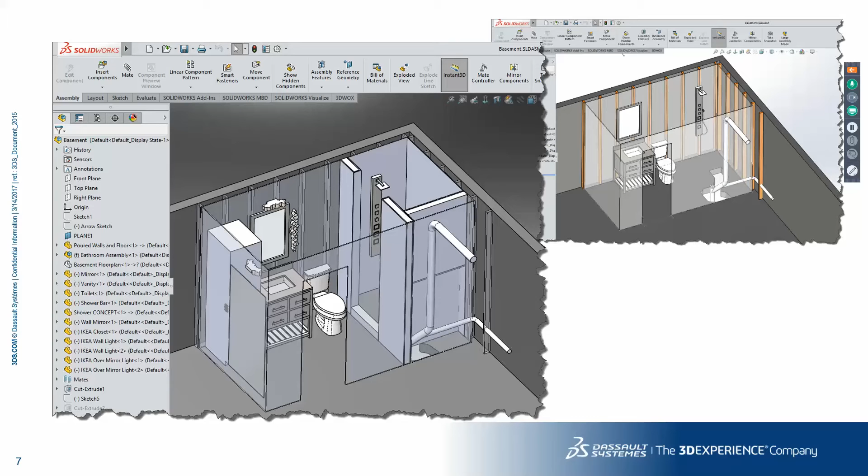My current project, which is coming along very nicely, is this brand new bathroom in our basement. So section 3, which we're going to be doing a week from today, I'll hopefully be posting some finished pictures of this for everybody.

So the things we're going to cover in this presentation sort of dovetail what we did in the last presentation. Our 5 pillars here are innovate, design, validate, collaborate, and then manage and build. And those are the perspectives that we really look at our software when we're looking at it from the customer view. Now, for what we're talking about today and the data set that we're using, we're leveraging a data set from Myomo. And they're a SolidWorks customer that really utilizes every aspect of what our tools have to offer.

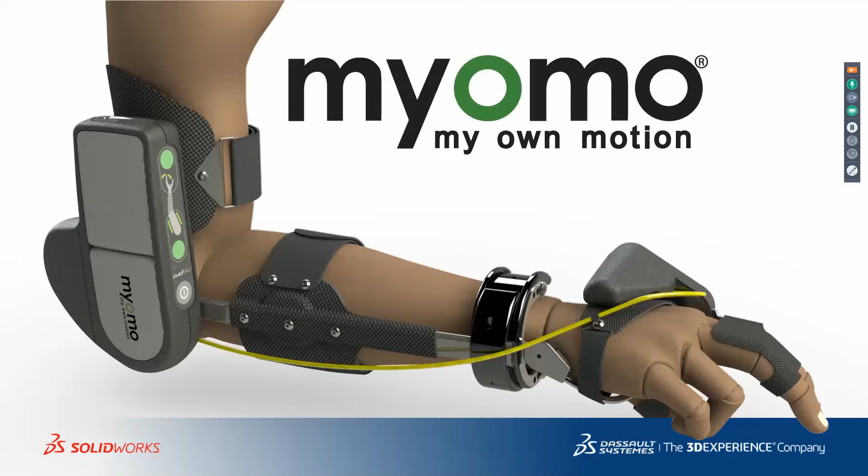Obviously, with these files, there's mechanical design, but there's also freeform shapes. There's electrical, right down to printed circuit board. And it really does encompass the gamut of what SolidWorks is useful for, which is basically everything. Now, when we're building the software, we have these pillars in mind. But as a user, you're really taking these pillars and applying them to your final solution.

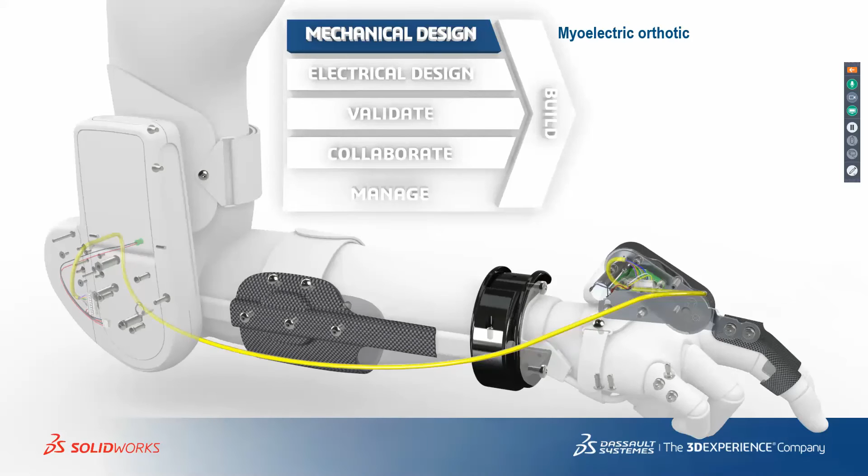So for Myomo's sake here, they take our mechanical design software and they use it to create this myoelectric orthotic. It's a functioning, moving device. The electrical design enables them to use motors and actuators and sensors to be able to overcome paralysis. So it is truly electrical design in our eyes, but it has a downstream goal involved.

Validation is something everybody should be doing. When critical parts are involved, we want to make sure that those parts are going to function, and especially when it comes to parts that are going to be produced in mass quantities. Validation allows us to not only find out whether our parts are going to break, but what I find almost more important is finding parts that are over-designed and being able to enhance and optimize the material utilization.

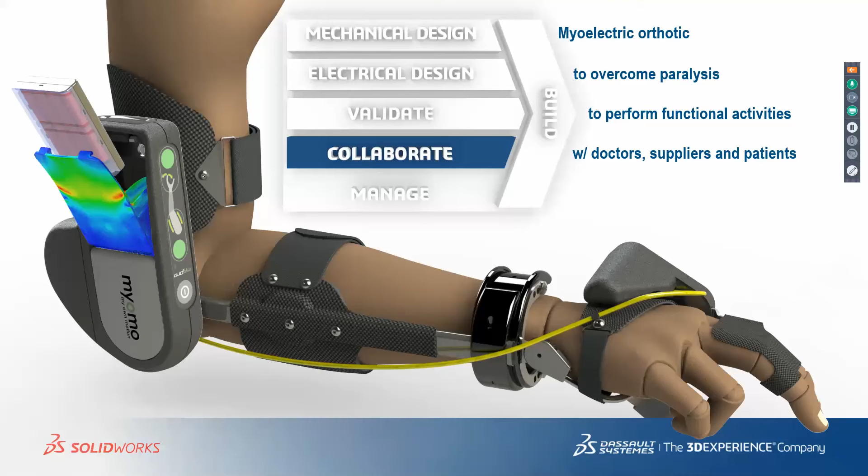So when you make a lot of parts, especially when it comes to plastic and metals, you're going to be able to save a lot of those material costs up front by designing the most optimal part for its use case. Now, collaboration happens in the eyes of everybody in a little different way. For this type of product, it really is a collaboration between everybody involved, not just the designers, but the doctors that let us know what patients' challenges are, and the patients themselves who give you feedback as to exactly how the application works, what is working and what isn't, so that things can be modified and revised as necessary.

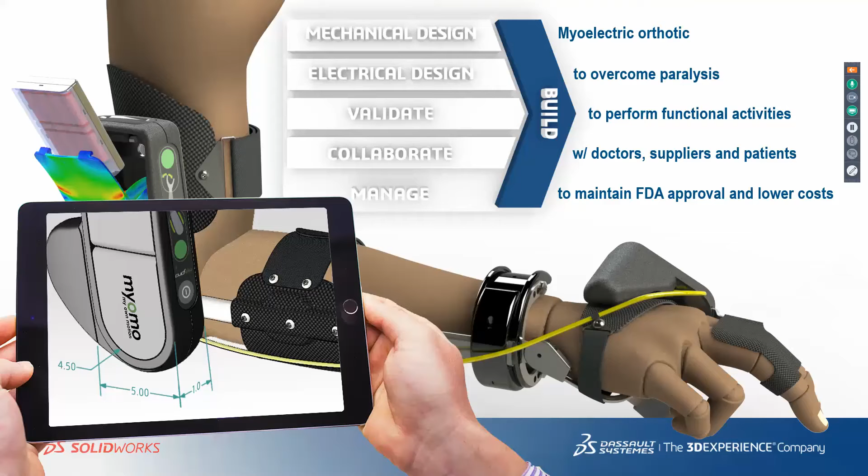And then everything that's taking place really should have a single source of the truth, and that's management software like PDM. In this case, when you have the FDA involved, it's even some next level than what most people have to deal with, but it's super important to be able to make sure that the right people get the right data at the right time. Now, all of this has to happen, and this is everybody's company, but we got to do it at the lowest cost possible. So we want to make sure it's efficient and that it works, but we've got to do it in the least expensive way possible.

So the 5 pillars that we are covering here, we're going to boil this one down into part 2. We covered a little bit of design last time and the innovation. We're going to cover the rest of design, talk about a little bit of validation, and then we'll do a little bit of the collaboration area as well.

Now, validation, I'm going to show some slides and some videos for. We've already done a full 1-hour webinar for the What's New in SolidWorks Simulation 2017, which is already available on our website. But we want to cover it here just to make sure that you're aware of it, especially for those of you who are more primarily mechanical design, but still need to dabble in the validation tools.

So this is our roadmap today. We're going to do some assembly functionality, magnetic mates, which is a brand new capability with SolidWorks, and it leverages a bit of our Speedpak technology, which has evolved in a very tremendous way over the last decade. The mate controller, which we introduced in SolidWorks 2016, has some much needed enhancements based on customer requests.

And then we'll get into a little bit of validation when it comes to our simulation tools, including flow simulation and SolidWorks Plastics. Today we'll finalize with a little bit of our collaboration tools, talking about a new technology called 3D Interconnect. And then finally, some collaboration from a marketing standpoint with SolidWorks Visualize, as well as a little SolidWorks Routing. So let's go.

First, with our assembly delighters, and we use that term a lot, but I think you get the feeling for that for those of you who've been through this a few times. Delighters are those things that you just really find are pleasant. They really help the interface. Maybe you didn't think of them before, but they really do make it for a great user experience.

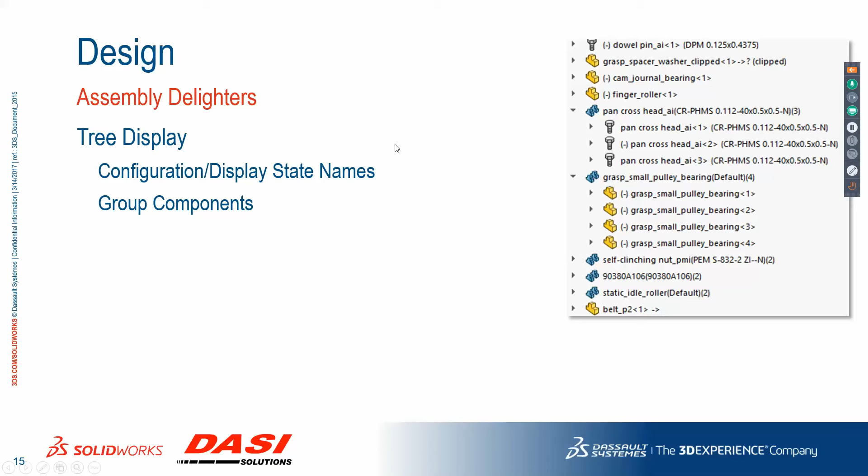Our tree display, which has been getting very, very full of detail, has some new controls here for being able to clean that up depending on your needs. We're also going to talk a little bit about how component placement takes place now during mating. And it's a little bit of a better process here just based on how you select things. And then with this section here, we'll finish up with a dovetail from part 1, which is saving assemblies as parts, but the maintaining of the references is really the most important part of this feature.

So let's get right into this data set. So what we're working on right now is this assembly. And for those of you who deal with a lot of files, maybe files that have verbose names, the feature manager can be quite a bit of an eye chart. And what we're looking at right now are things that have been required up to this point, which really do muddle the display.

Well, to clean this up a little bit, we've added a few key things to our feature manager. When you right-click the name of the part of the assembly, you have the ability to go down to Tree Display. And a new option here says, Do not show configuration display state names if only one exists. So with every part, you always have at least a default configuration, and there's really no need to see that. So by triggering this option, we really do have a much more pleasant and less muddled feature manager.

Now, another thing that can happen based on your assembly technique could be dealing with a lot of top-level components that can really extend the length of a feature manager. Now, you can compartmentalize these into subassemblies if it makes sense, but in many cases, this could be the subassembly where all these fasteners are sitting here in the top-level tree. So another right-click on the name of the assembly down to Tree Display gives us another option here where we can dynamically group component instances together.

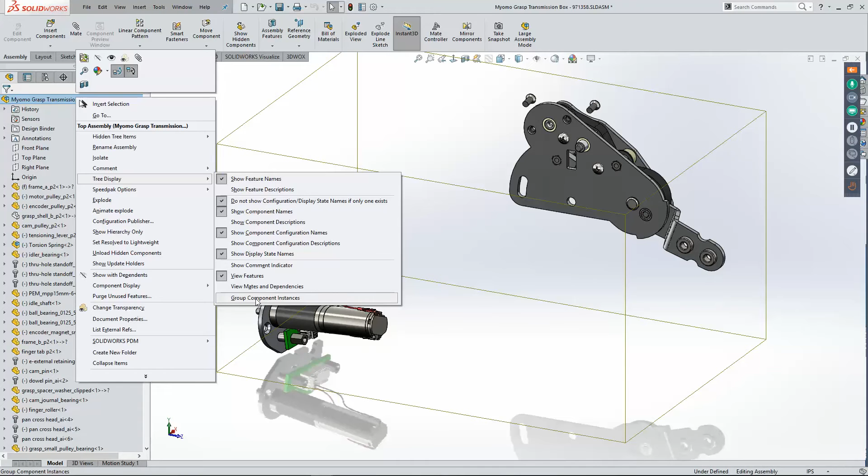Now, if there are subassemblies, it's not going to reach into those subassemblies and group them here, but it's more or less dynamic folders. So as you select it, you'll see that all of the groupings of the fasteners jump into these little collapsed types of items. Now, they work like folders. The icon, of course, is very specific as to what's going on with the grouped features, but it really is a great way to be able to collapse and clean up what could be a very lengthy feature manager.

Now, when it comes to mating your components, mating is one of those things that's always been very pleasant in SolidWorks, but a great new addition here actually adds some relevance to the click point where you select features. So there's a little blue crosshair on the face of this part, which is where we've selected it.

Now I'm going to mate it up to this part, and if I control select it and now click coincident, those two crosshairs, those actual select points, will be joined to each other. Now, not joined in a physical way, but they are matched up with each other, which effectively gives us both a mate and a move with that operation.

Much more convenient. We'll finish this up a little bit by adding some concentricities and just making sure that this motor is in the proper position. So that looks really good.

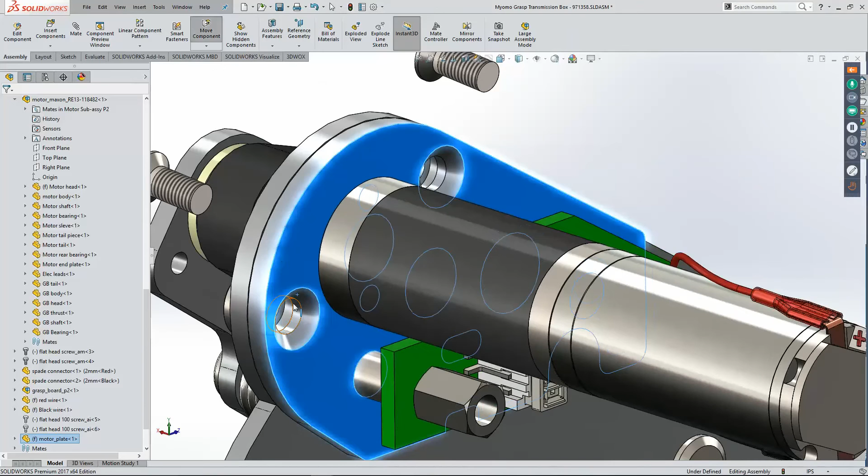Now there's some more smart placement when it comes to things like these countersunk fasteners. Now these have a tapered face to them, and with tapers it doesn't work quite as conveniently with the placement like a coincident and a concentric works on a cylindrical part. Well, now what happens when you select these tapered faces is it enables us to add a coincident relationship.

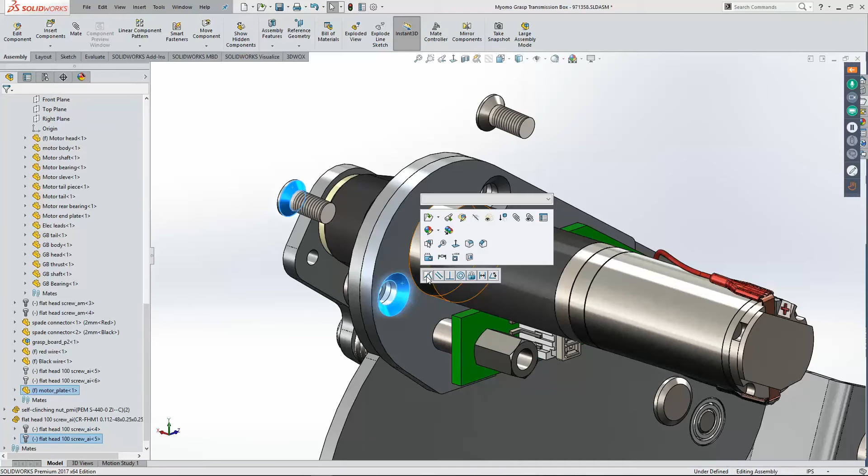Now, of course, they're the same angles as each other because the Hole Wizard and the Toolbox library have these tapers built in. But as you place those, you'll notice that it not only puts the coincidence between those faces, but it also inverts the part to place it more properly.

Now we have a little motor sitting inside this assembly, and many ways to receive this type of data. A lot of times it's found on a download site, whether it's the supplier site or 3D Content Central. And a lot of times we'll be given these files in a way that maybe isn't the best way to manage the document. So what I have right here is a motor, and it was downloaded as what appears to be an imported assembly. See, all the files underneath have a featureless tree.

Now, I really regard this type of data in the way that I receive it. So if I'm an assembler and I get a limit switch or a motor like this, I'm really not concerned that it has shafts and bearings and end caps. I really just want this part to represent what I would purchase. So in many cases, as a file management improvement, we wouldn't want to have this as an assembly. We want to have this as a multi-body part.

So I'm going to open up this file into its own window for a moment just to show you a couple nice functions for this. Now I like to use breadcrumbs. You'll notice that through my presentation here. A little tap of the D key brings the breadcrumbs local to my cursor position, and as I select those, it enables me to select subassembly depth, which in this case, I'm going to pick the motor itself. We'll open that in its own window.

Now something to be very clear on with what I'm working on. I'm going to go back to the assembly for a moment here just to illustrate this. As we look at the breadcrumbs here, one of the things I want you to see is that this subassembly has mates on it. There's concentricities and there's coincident mates amongst the parts that happen to be here. Now if we take a look at this assembly as a whole, you're going to notice that the position of this part is located based on the fastener holes on the front faces, as well as a coincidence between that front cap and this sheet metal part that we have there.

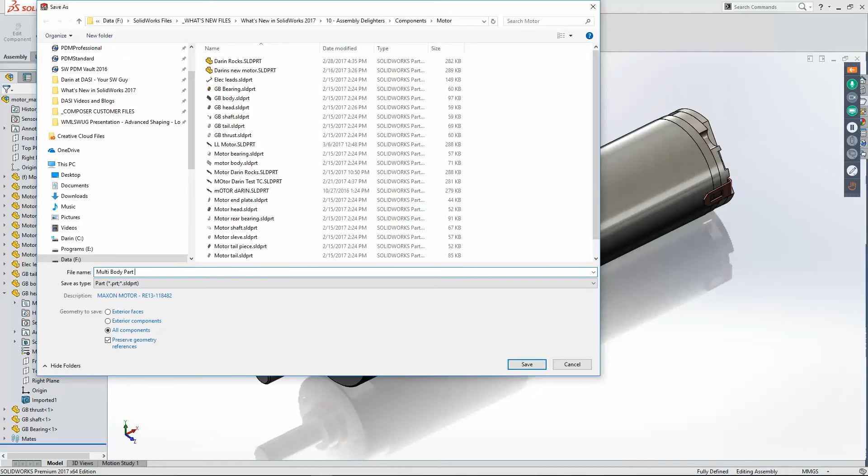So we're going to go ahead and call this one multi-body part webinar. Good enough. Now when I save this file, what you'll see is a visually perfect document relative to what we just saw right there with the assembly. And I'll tile my windows here for a moment. You'll see some other stuff we're going to cover in just a minute. But essentially what we've got now is an exact duplicate in a multi-body part versus the assembly that it represents. So the file looks great.

But what happens when we address that back in the top level assembly? Well, here we're going to do a component replace. And a few years ago, we allowed you to actually go ahead and replace an assembly with a part file. So here I'm going to take this subassembly and we'll just simply replace the component. Now we're going to take the assembly and we're going to replace it with the multi-body part that we just saved. But the key here is that we are going to reattach the mates. Typically a check mark I would remove in this situation.

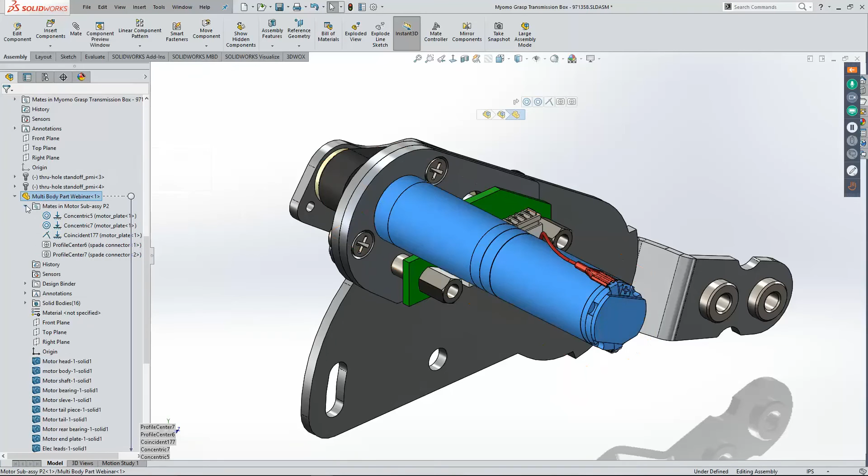With reattach mates turned on, what you'll notice is 5 beautiful check marks. And what that means is we've now swapped this file out. Instead of it being an assembly, it's a multi-body part, but we didn't lose the concentric mates in the fastener holes, nor the coincident mate on the front face. And this is a fantastic feature. You're going to see this emphasized a little bit later in 3D Interconnect.

Now a few additional things I wanted to make note of here is, first of all, any mates that have dimensions associated. So limit and angle, whether they happen to be limit distance or just distance mates, or the width or slot mates if you happen to have them set to percentage or distance. You can basically set these mates now to a driven value.

Now much like a driven dimension in a SolidWorks part file, this is a dimension that would react to other dimensional changes or part position. But the usefulness here is that that dimension might also be used to solve other things during equations. And that makes it nice and convenient that it can sit there and react, but then itself be used as a solver in other locations.

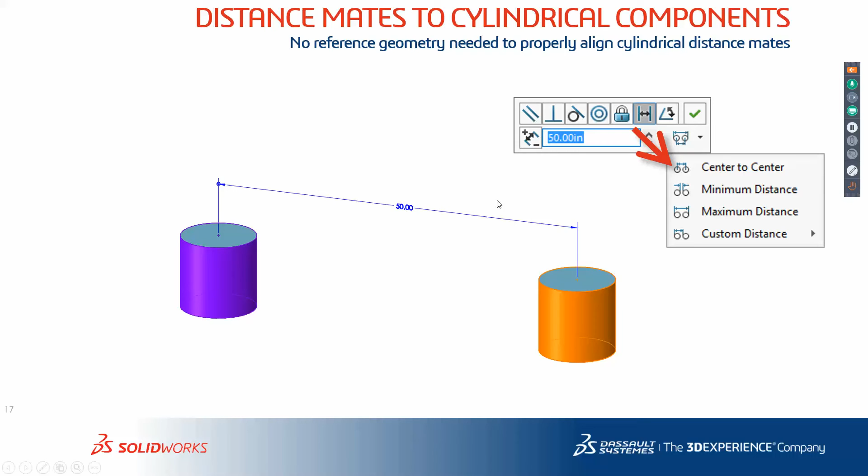Now this might look like the measure tool to you, but this is actually the distance mate between cylindrical bodies. Now we have a very similar method here that we can now use that's the way that we would measure cylindrical bodies in an assembly or a part. And in this case, we can now mate them either center to center, which is the distance default. We can also say minimum distance, which would be the tangencies closest to each other, or maximum, which is going to be the outside edges.

Now there is a fourth option here, which is a mixed bag. You could go to the minimum edge of one and the maximum of the other, just based on whatever the circumstances dictate.

Also a great enhancement added to 2016, but not always a perfect use case, was the ability to select a hidden component in the Feature Manager and see that component as a transparent preview in the assembly window. Now, this is great for most files out there, but we've noticed a few customers that are dealing with very heavy documents, imported data, very complex parts, and huge surface bodies. And those do add a little bit of a performance hit to it. So there's a new option that allows you to enable or disable the hidden preview transparency.

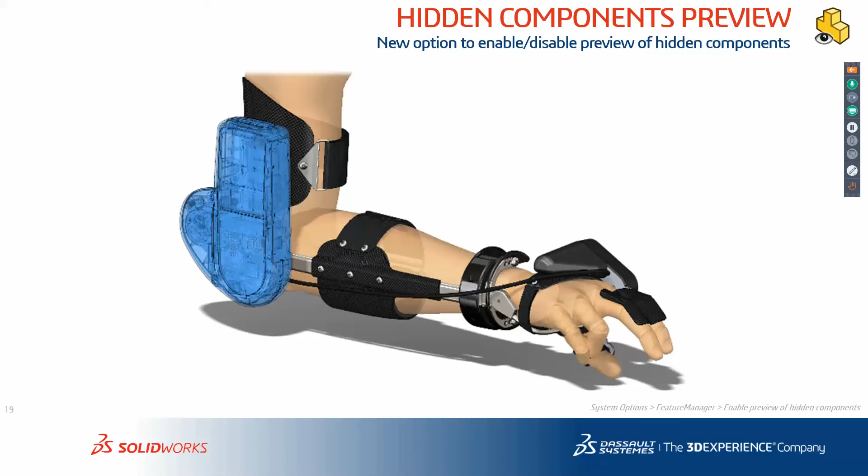Assembly visualization is a great tool for looking at your assemblies in a whole new way. Now, ways we've done this up to this point were the ability to sort your components either in mass, highest to lowest. In some cases, we would sort based on columns of properties like ownership and workflow state if you're using PDM. Great way to see what parts are in what states, and they even colorize on your window. Well, a new thing that we've added here to SolidWorks 2017 is sorting the parts in their last registered open time. Gives you an idea of which parts are heavier in the system and exactly what's taking place with those.

Now, I'm going to go back to this assembly for a second because I want to show this file. It's an important thing here because I'm not going to show open time. That's just one of the new ones. But one that I really like to use on this is graphics triangles. If you go to the Evaluate tab, you'll see Assembly Visualization.

Now, it pulls the parts up immediately and it puts them based on the criteria. In this case, the default happens to be mass. So if we sort on that, we're going to have the highest mass parts followed by the lower mass parts. Well, I like to go ahead and take this column here and add a new one. We're going to go to More. And in this case, if you're having an assembly with a lot of performance issues, you can choose a SolidWorks calculated feature here that's simply called Graphics Triangles.

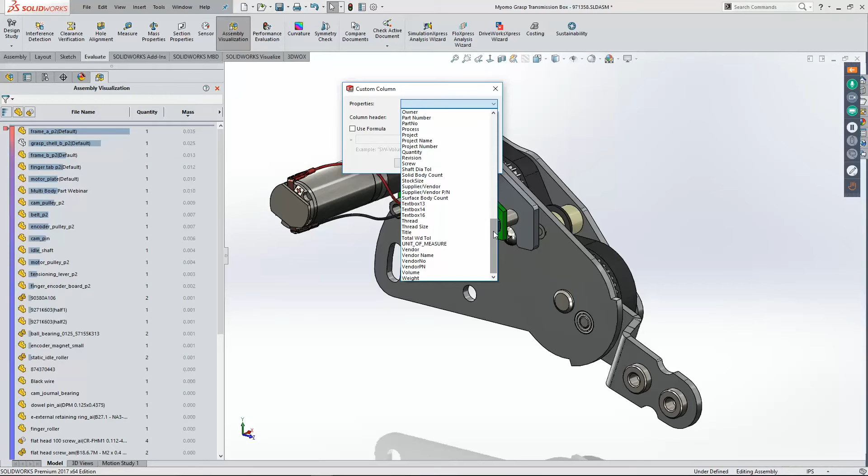Now, what we do with those graphics triangles is we basically sort this file based on the actual hit of how many triangles are going to be shown in this file. Now, this is what your video card sees. So when you pick graphics triangles and you say OK, we have the most offensive part in this assembly at 51,084 triangles, and there are 2 of them.

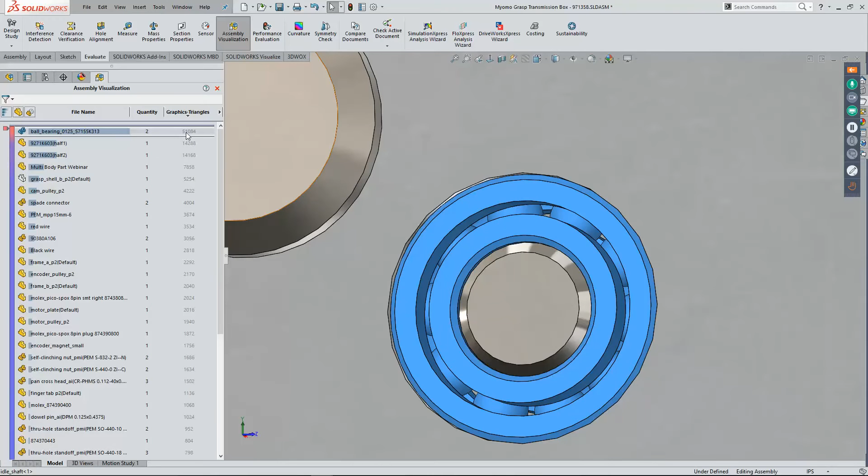When you select it, you will get bidirectional feedback, but the shocking part is this. If you noticed, the part that highlighted is this tiny yet huge graphical bearing. And all of those spheres on the inside are creating thousands upon thousands of unnecessary triangles. Now, this is a situation where we could easily open this bearing in its own window, either hide all of those spheres or extrude a rectangle or circle over top of them and basically minimize this part down to the small number of triangles that it should represent.

But this is a key example of the type of thing that we see when an assembly isn't performing up to snuff and you're not quite sure why. There could be a very small part in there causing a very big problem.

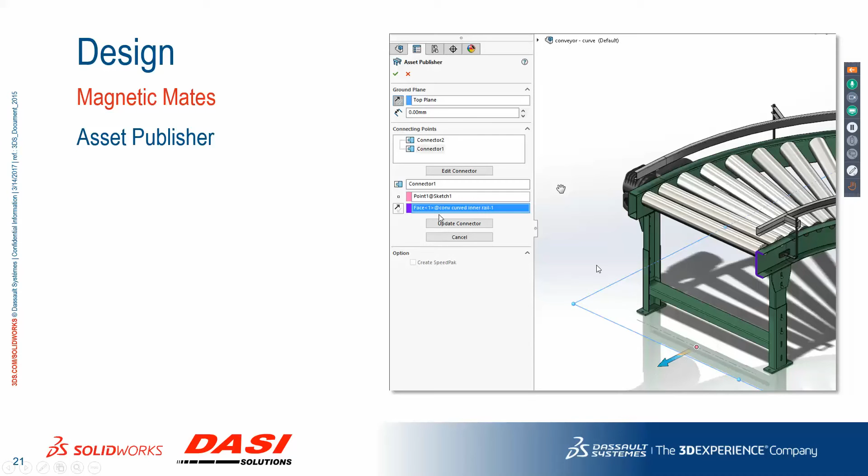I want to move on to magnetic mates. Now, this is a coupled feature with our Speedpak tools, and Speedpak's been around for quite a long time. But what happens here is you're basically setting up files so that they can be picked, dragged, and snapped into place off of a library. We use an asset publisher to be able to determine location and normal direction for the parts so that we know how one snaps to the next.

Now, during this, we use Speedpak in a lot of these cases where these assets can be included, as well as any other detail, body, face, or feature that you might find important enough that needs to be active in the math body. Anything that we add to the Speedpak would be useful in mates and dimensioning on 2D drawings. Now let's go ahead and do that, jump past my slide.

So we're going to open up SolidWorks one more time, and I'm going to jump over to a very large assembly here, which happens to be a plant layout. Now, this plant layout is several thousand components, and you can see that it rotates pretty nicely on the screen, though I'm sure we're getting some degradation because of the bandwidth across our GoToMeeting.

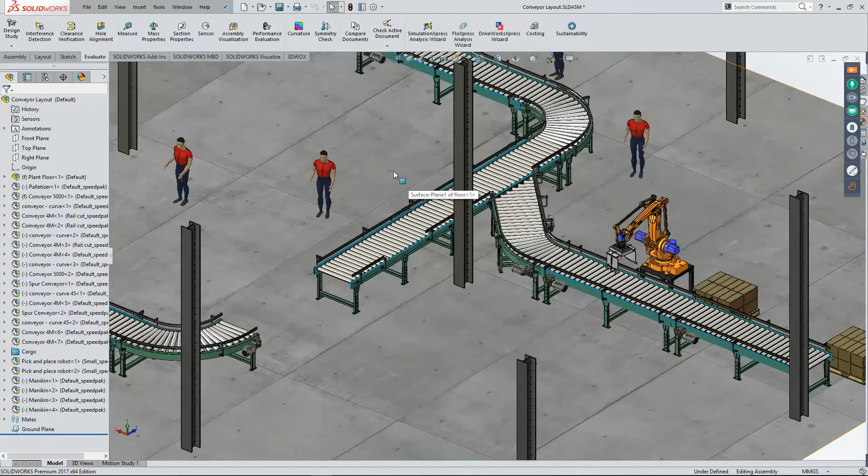When we're using our magnetic mates, we're basically just dragging components into place, and I'm going to do that by inserting a few additional components. When we select Insert Components, you can go ahead and browse for parts, or you can select them directly off of this view. For this one here, what I want to do is just go ahead and grab my spur conveyor. Now, there are setups in this which determine automatically the mating to the floor, which it's positioned, but we also see these magenta dots show up.

And when you get a particular distance from those magenta dots, the mate starts to grab hold. Now, it's not going to actually put the mate in until I select or click on the screen. But once I have my part in position, I can go ahead and click, and it will then continue and mate those 2 dots together. So I'm going to do one more of these just so you can really see what's happening here. Now, as I drop the component in, a simple touch of the tab key would allow me to toggle position, so I can rotate that at 90-degree shifts.

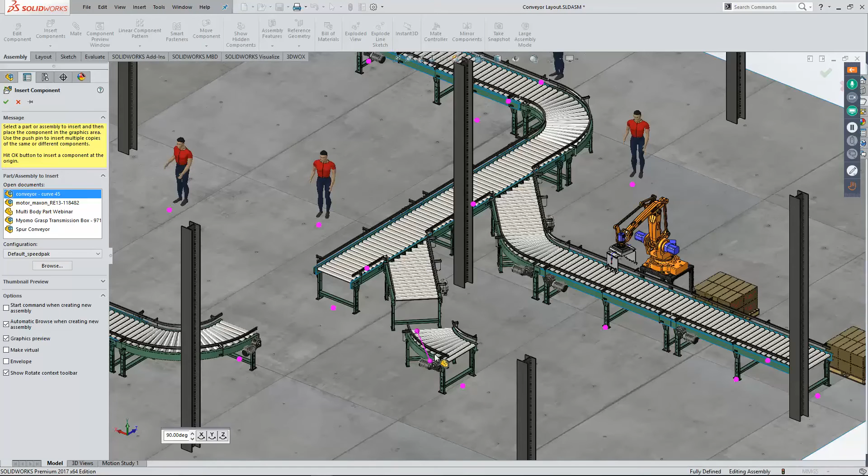And again, when those dots find the awareness of each other, we can select and it will simply put that mate in. Now these things can be selected and detached if necessary. So if I have another conveyor section I'd like to move, I can rip that magnetic mate away, and as soon as it's closer to one of these other dots, I can let that mate come into play.

Now typical Windows does work here as well, which means copy and paste. So if I hold the Control key down, I can take a second instance of this pick and place robot, and I can simply snap it over to the second instance of this assembly line. Now as I drag things into place, I'm sure you're seeing that the performance on this is pretty stunning. We're dragging lots of parts around, we're snapping them into position, and they're moving in a very predictable way.

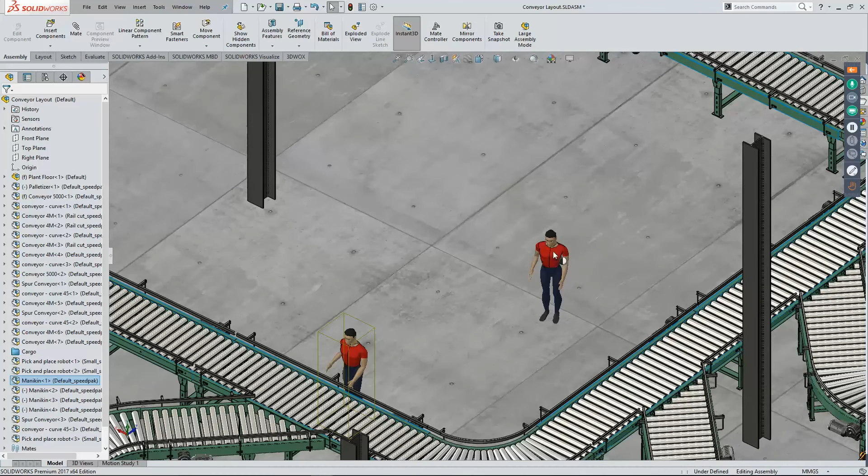The mates that we put on during the asset publishing allow us to go ahead and control the positioning. So as I drag a component around like this, if it's sitting in the relative position it needs to for that mate, that's great. But once I go ahead and put one that's not quite in the right position, it will normalize or change the attitude just based on how the magnetic mate happens to be built.

Now everything that we're doing here is actually utilizing our Speedpak technologies. And for those of you who use this, you might notice the tiny sort of yin-yang sphere next to my cursor there. And that's something that indicates that my cursor is over a mix of hidden and shown components. Now I'm going to go ahead and toggle my Speedpak circle, which I typically do in Tools and Options under Display. But here with a little hotkey, I can go ahead and show you that X-ray vision that we give you with Speedpak to let you know what is in fact loaded into the math footprint and what is really just there based on your video card.

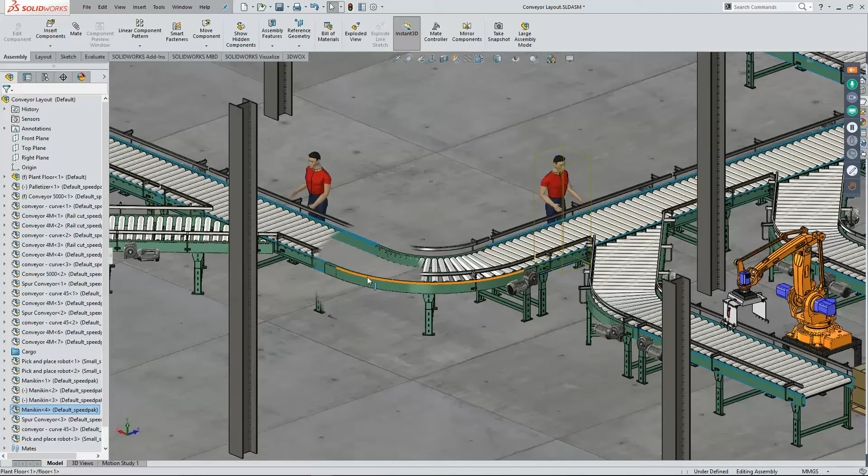Now we set these assets up using these types of techniques. And if you're unfamiliar with what Speedpak is, it really is just a sub or derived configuration of the full-up mathematical configuration. Here we see the entire default configuration, and then below that there is a Speedpak variant. Now as I hover over this assembly, you'll notice that just the curved rails are actually loaded into the math footprint. If I then double click on the full-up configuration, in this case it's going to load the math data for absolutely everything. So it's very easy to fluidly move in and out of the Speedpak variant.

Now to build up the magnetic mates, we do this by using our asset publisher. Now the published references here are really just based on selections and positions. The top plane is dictated as the ground plane, which is how it knows how to go into that large assembly. Well, we also have different connectors here, which are based on selected points and normals. So down here in the lower left-hand corner, we have a simple center line, to which we have a point right at the midpoint, and then the direction of our normal is facing outward. So that way when it mates up to an adjacent component, those faces mate towards each other.

As far as Speedpak goes though, Speedpak can go ahead and use these assets as well as anything else that you deem is important for mating and dimensioning. When you make a change or add a new Speedpak to your configurations, you get a window here that allows you to select those things that will be available. And you can fluidly edit this if you find that you're trying to make a drawing and you can't dimension to the faces that you wanted, or you're trying to put mates on and those faces aren't active.

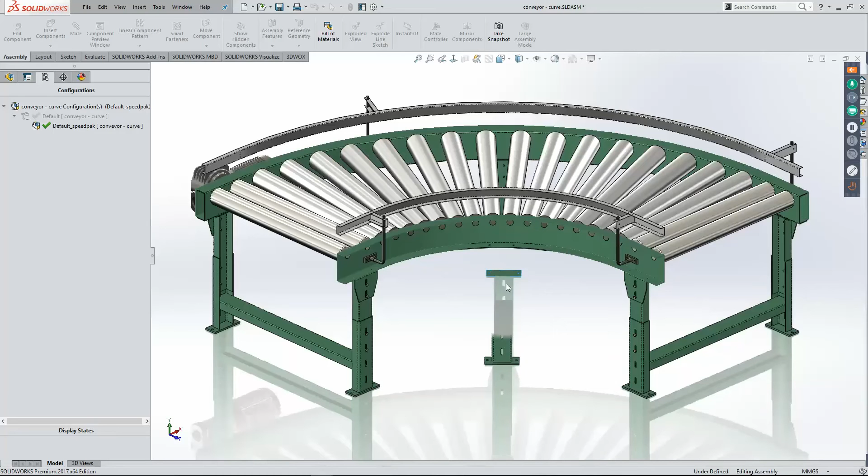The mate controller was introduced in SolidWorks 2016. And what happens with the mate controller is it tries to replace those situations where users make configurations in order to show different positions of a moving assembly. So if you make things like extended or retracted configurations, or even a higher level like this pick and place robot, the mate controller is a great tool to really keep your file size efficient, but allow you to capture these positions in a very simple way.

A couple of other side benefits to this are animation and the ability to go ahead and show this in an eDrawing. So I'm going to cover each of those. Now with this pick and place robot, any mate that has a dimension associated with it would be useful inside of our mate controller. Now what you'll see inside of my mates down here is that we've taken a lot of these angle and distance mates and we've simply slow double clicked them and changed their name to something a little bit more auditable. Just makes the user experience on this a much more pleasant thing.

Now in the feature manager is where the mate controller feature sits, and there's a button for it on your toolbars, but I've already got that one started here, so I'm just going to show you how this works. When we edit the feature, what you'll notice is that all of the mates that have dimensions are selected up in this box. And as such, you're going to see an individual line item with that dimension's value available to modify. Now at any point, we can go ahead and make new positions.

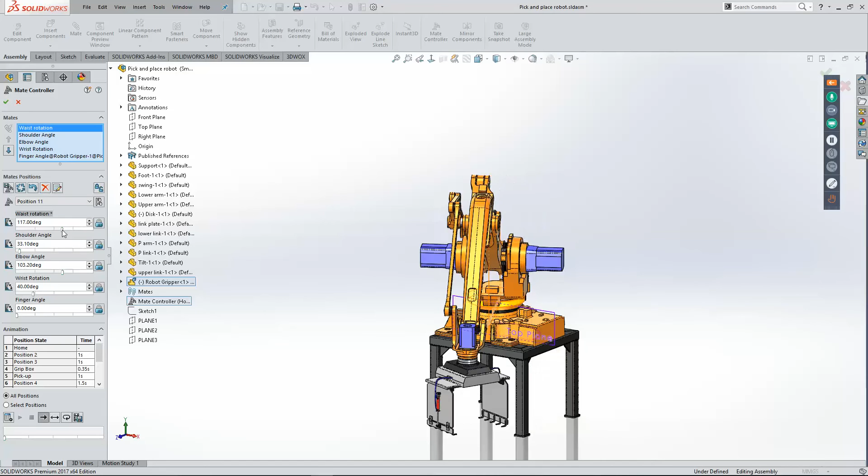When I go ahead and move dimensions in the sliders, that's my ability to go ahead and make changes through the property manager area. But you can also go ahead and unlock dimensions over here and then simply action on those graphically in order to capture these different changes. You'll notice the slider in the property manager is reacting to my changes.

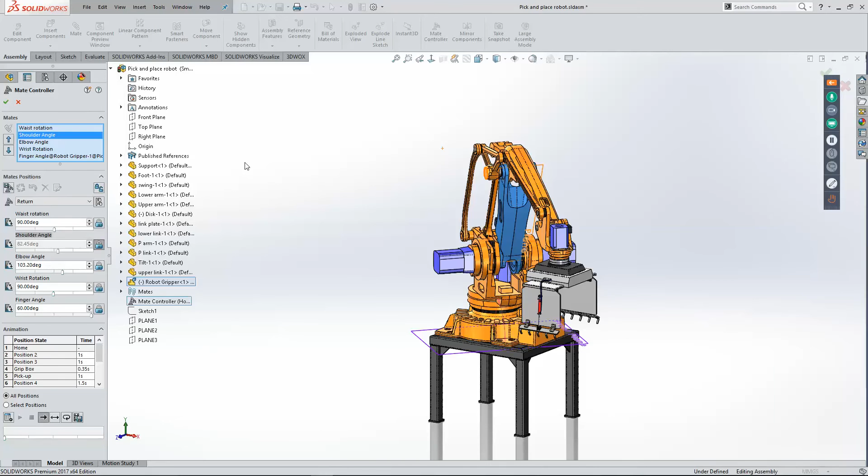Now if I like the position here, I'm going to refresh it based on the new values, and then we're just going to go ahead and be able to toggle between others. So you'll notice that as I go through the pick, place, drop, and retract, we're also going to get to position 11, which is right there, the position we just selected.

Now everything that we're doing inside of this tool is now something that, if need be, we do have the ability to capture configurations. So there's a button that's been added next to the Positions tab that allows me to grab a particular position. So in this one here, we're going to go ahead and go to the pickup position, and we'll capture a configuration. We're going to go to the home position here. We'll capture a configuration, and then we'll also go ahead and capture one over here at the open grip.

And you'll notice that as I do that, it's added configurations to my configuration manager, but it does indicate that those were added based on mate controller positions. The reason these are important is because when I go to a drawing, I still need configurations in order to register and hold a different drawing view from one to the other. So by selecting in these drawing views, I can select this one and go to my pickup position. My home position is going to be right here in the middle, and then over here is my release position.

So configurations are still necessary, but we can limit the amount of overhead that they produce by simply using the mate controller where necessary, and then configurations where it has to be. Now one side note on this is that when we're dealing with our mate controller, we have a couple of additional benefits.

One benefit is the fact that down here at the bottom, you can determine what timestamp it takes to go from one position to the next. And that's a very effective way to make an animation.

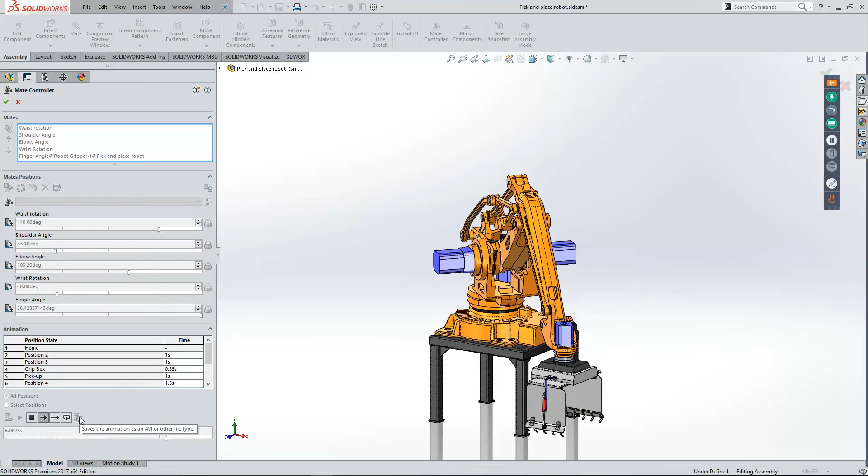Now this animation can easily be saved out as an AVI file just by clicking this button. And if you happen to have PhotoView 360 turned on, that would also enable you to output a full photorealistic rendered animation based on this tool. But one of the things this does not do is it does not trickle down into eDrawings.

Now down here in the Motion Study tool, this is the tab that we put different types of keyframe-based animations in. You'll notice that if I expand this out, all of these mates have absolutely no keyframes. Well, this tool here is supported as the animation tool inside of eDrawings. Where you can bridge the gap is by simply going to the wizard.

And when you make a wizard, the Mate Controller Inputs is a selectable tool to produce this wizard. So when I tell it simply where I want it to start, 0 seconds, and the duration, which is 10 seconds, it'll automatically produce all of these keys based on my Mate Controller. Now if I save this assembly and open it with eDrawings, this animation will be fully supported in that eDrawing output.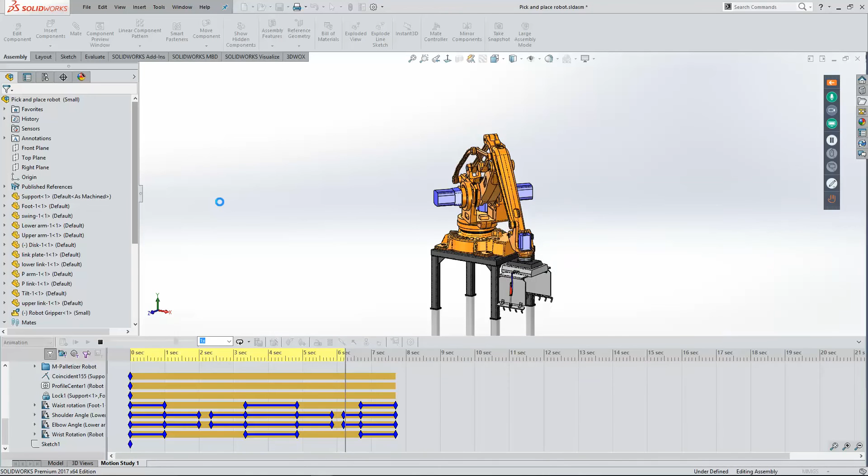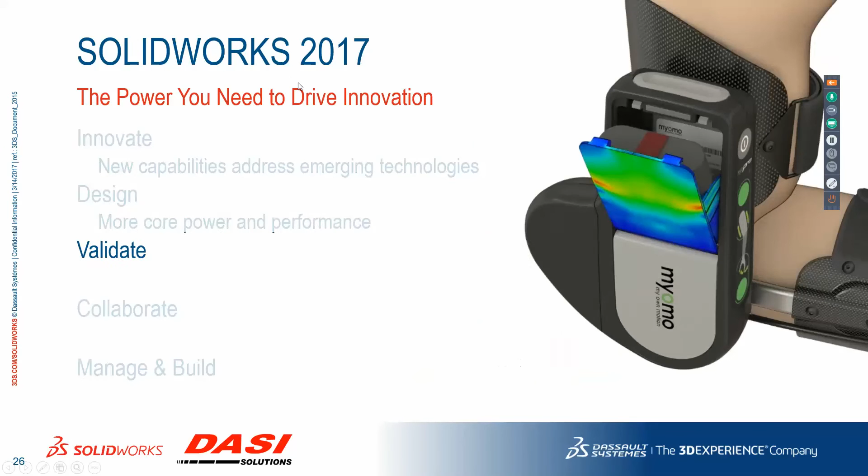All right, so let's move over now from design into a little bit of validation. Now validation really should be done on any critical parts. But as we're working on different parts, they all have a different criteria of how you might want to verify their capabilities. So we're going to start in SolidWorks Simulation.

One of the most frustrating things I've seen happen and have had happen myself is that I'm going to go to a meeting, I'm going to spend a couple of hours there, and in order to maximize my time, I want to set up a simulation while I'm in the meeting. Well, many times users find that when they return from that meeting, there's a box waiting for an action. Well, SolidWorks 2017 changes that.

We now have automatic decision making, and it'll take the last decision that you made on these boxes and in 30 seconds simply continue on. So in this case, if you have a large displacement question or a direct solver message, it's going to use the last thing that you did and it's going to simply continue on. No more frustration coming back from a 3-hour meeting to find out your computer was waiting for you to say yes.

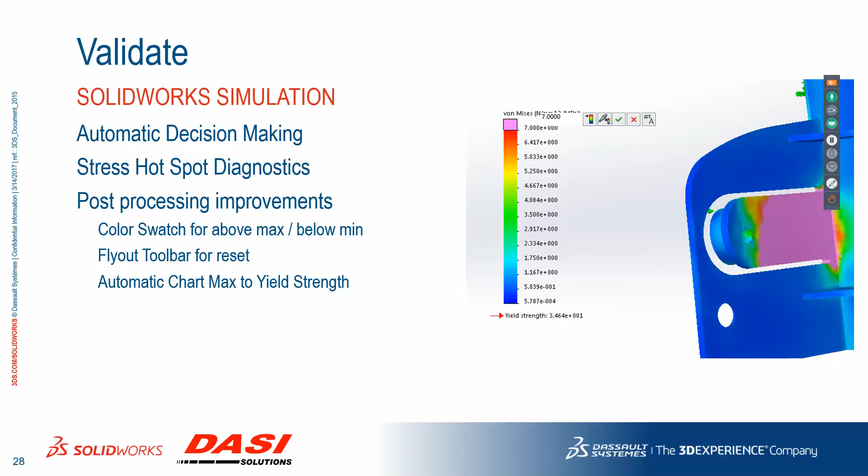Stress hotspots are also much easier to see. We kind of gray out or make transparent the rest of the body and really emphasize the location of where these hotspots happen to be. Colorizing of these charts also improves this. In this case, what we're seeing is yield strength, and anything above that happens to be pink. So it's very easy to see all of the areas that need to either have a thickness added to them or maybe even a different material in order to have a higher yield strength.

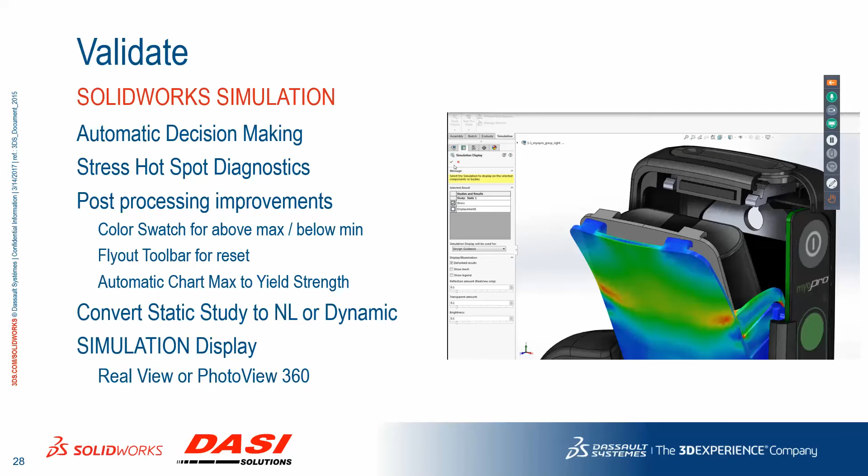We also have easy methods to convert basic static studies over to a nonlinear or linear dynamic study, as well as the ability to show things like these plotted and/or deformed plotted features and parts within your real SolidWorks assemblies while you're working. So first, if you have a study, you can right-click on the tab and say Convert.

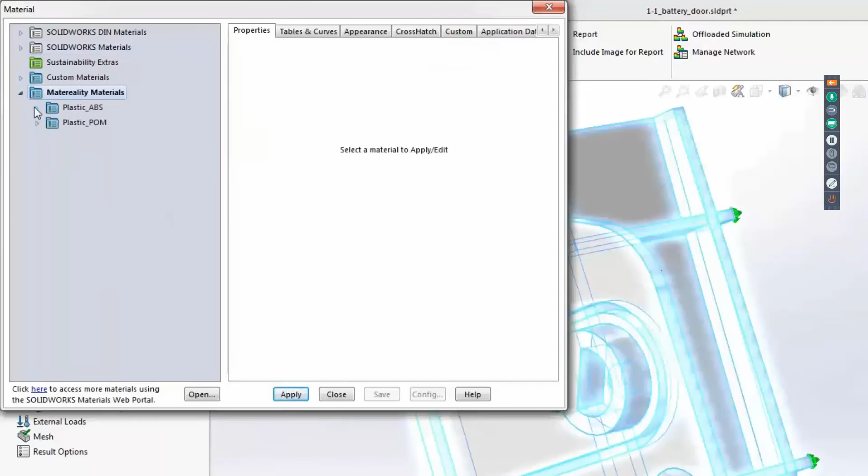Now, converting that study is a simple matter of taking your static study and switching it over to a nonlinear or a linear dynamic. All of the loads, boundary conditions, and setup will transfer across. You simply need to choose it, maybe set it to a nonlinear type of material that has the proper stress-strain curve, and then from there, you'll be able to easily run that nonlinear analysis. In this case, we're going into an ABS plastic, and of course, plastics are the types of components that are in the wheelhouse for a nonlinear analysis.

For showing simulation data on a plot, this really leverages a lot of the RealView technologies we already use. You simply select the plot that you've selected, and it will put a hybrid texture over top of the part. If you'd like to show it deformed, that's also another checkbox away. This used to take in the past a whole lot of work in Photoshop to be able to meld two different images together to get this type of effect. Simply done here.

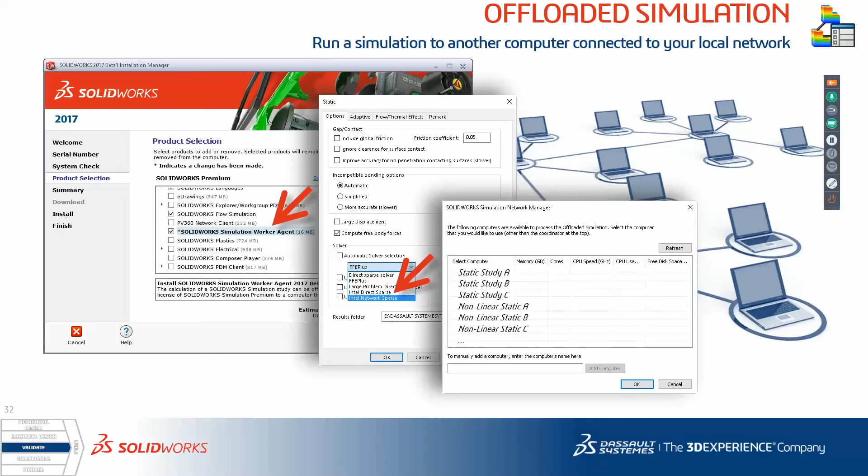On top of this, we have some new capabilities to offload simulations onto other computers. By installing the SolidWorks Simulation Worker Agent on another computer and utilizing the Intel Network Sparse solver, it'll go out and grab those other computers once the solver has been triggered, and it will run it on a different machine while you sit and continue to set up different studies.

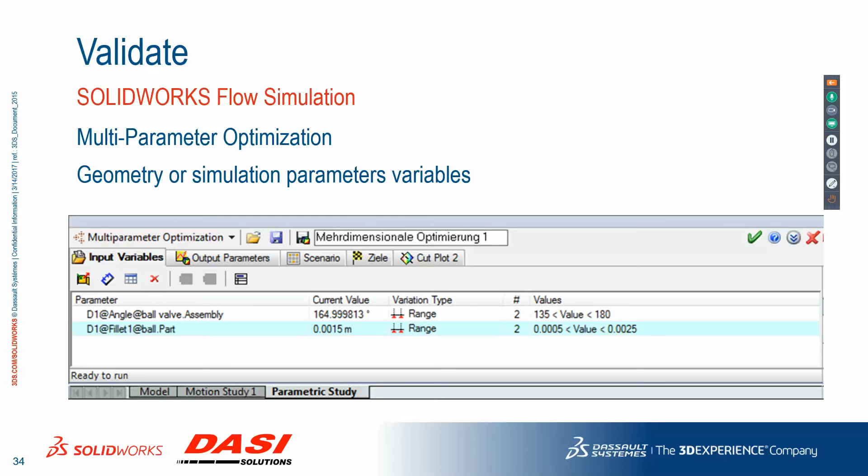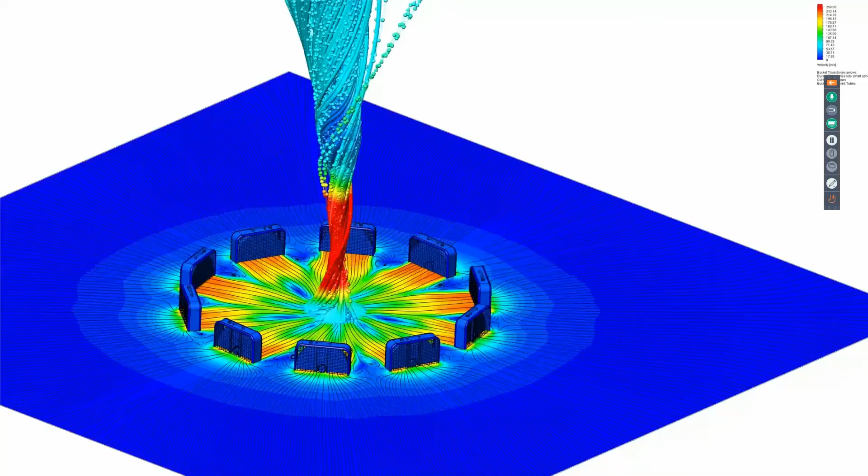Our goal here is to optimize velocity at the top of the vortex of that flame. So what you'll see as we add additional fans and get the angles just right, we have now converged to the maximum velocity at the red area that you see on the flame. So it's a great way to put in what can happen and not have to sit there and deal with the minutia of the change and the rerun.

As far as SolidWorks Plastics goes, we've got some great additions here that have to do with some other things we've had for a while, like intuitive weld line display. Now, weld line display is nothing new. All the products that do plastic injection molding have this. But our weld line display lets you know what angles those flow fronts meet.

And when you have a flow front that meets at a very sharp angle, what's going to happen is those flow fronts will hit and sort of deflect off of each other and not really meld together. When they hit at a very flat angle, those flow lines are going to overlap each other and really converge into a nice clean set of the plastic. So it's important not just where weld lines are, but the angles at which they meet will have a lot to do with the ultimate quality of your part.

We also go well above and beyond just simple mold fill. Here we actually have cool accuracy, which means we're going to hold the part and we're going to pack it until the time at which the part cools and the residual stresses in that mold can release. If you pop that part out too quick and it's still too hot, the part's going to sit on the table and warp right before your eyes as it cools.

So again, we are not just a mold fill application. We bring it right down to the full cycle of any part. And this is where you can get efficiency, good parts or bad parts, just by leveraging a few seconds here and there. When we're talking plastic injection molding, it's all about time and throughput.

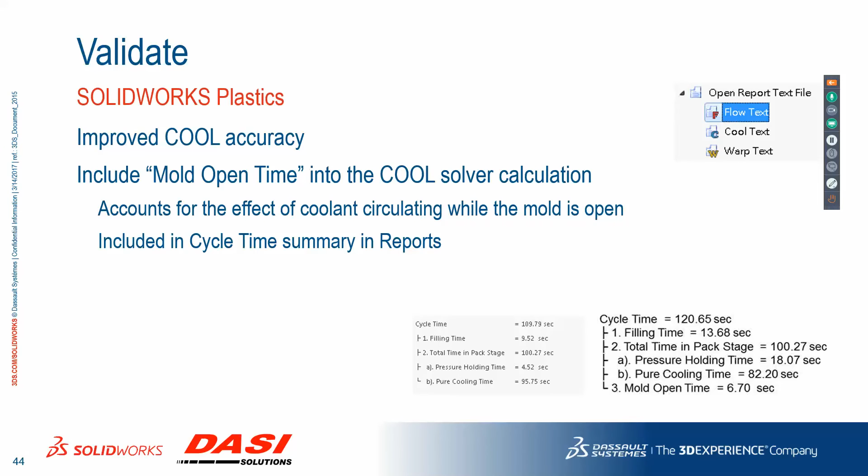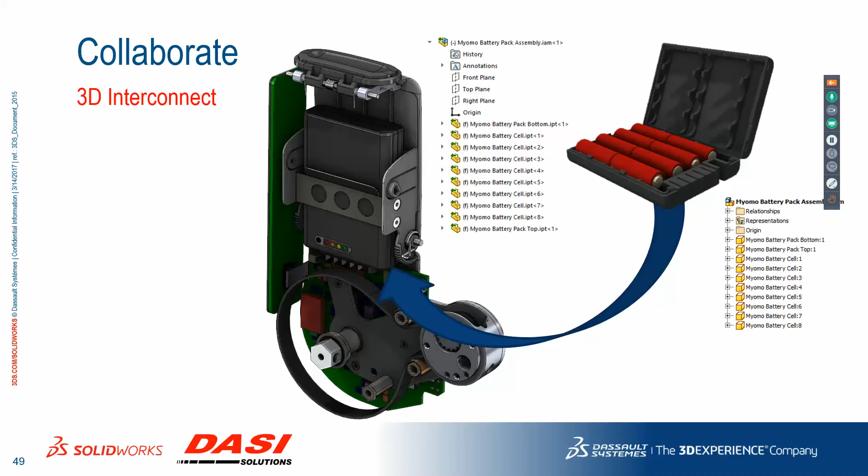So the last section we're going to cover today is going to be a few of our pieces of the collaboration tool. We're going to start out with 3D Interconnect. 3D Interconnect is most simply described as translatorless translation. We're going to utilize data from other systems, but we're not just going to bring it in as neutral bodies. We're actually going to reference the files in the original systems.

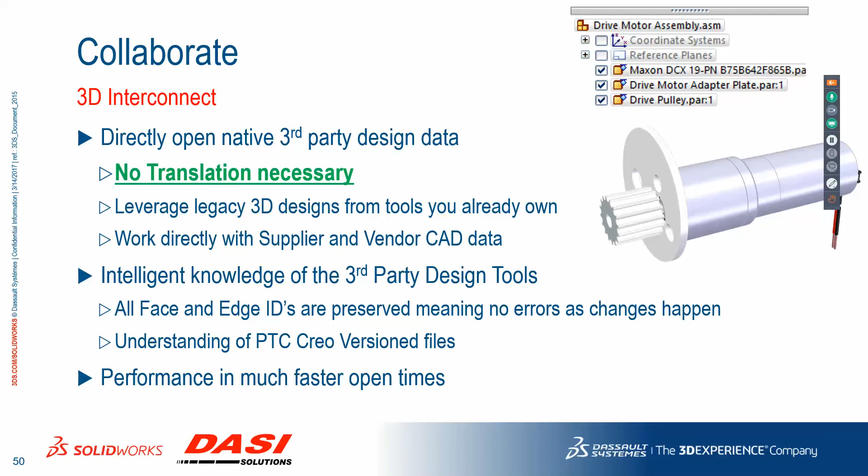Now, there's many different ways that this thing works, but the theme is native opening of third-party design data from a lot of other CAD tools. We are not translating it, we are referencing it, which means changes that happened in the original system will trickle into SolidWorks. Now, we also, as I mentioned before, keep face and edge IDs. So if we make edits to those parts in SolidWorks and then in the original CAD system they change, the edits will most likely fluidly update in SolidWorks.

The file types that we're currently doing with this are our primary competitors. So Pro E or Creo, depending on how long you've been calling that product its name, Autodesk Inventor, Solid Edge, UGNX or Siemens NX as it is today, and then CATIA V5 if you have a SolidWorks Premium license.

Now this is an interesting side note because what many of you may not realize is that with SolidWorks 2017, if you own a SolidWorks Premium seat, you now have the CATIA V5 translator. Instead of putting it out there as an extra purchase, we've now just baked that into every SolidWorks Premium seat. In this case, you'd need that if you're opening CATIA files using 3D Interconnect.

So there's three different processes that I'm going to demonstrate here. First is the direct insertion of the files from the other systems into the SolidWorks assembly. We'll mate it up and use it just like we built it ourselves. Second, we're going to open the file up as the more typical way, which is a base or derived part. We open the file, we're going to make some changes to it, and then that file is also going to change in its original CAD software.

And then finally, the most traditional way is just opening an imported data and breaking the link all together so that we can either modify it or add things to it as necessary. In all cases, preserving face and edge IDs. So let's get right into this.

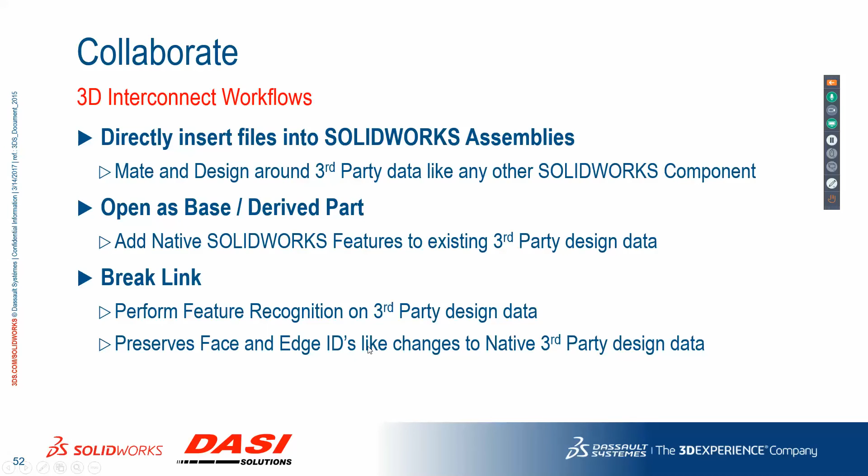First thing that we're going to cover is direct insertion. Now I'm going to take an Autodesk Inventor file and use it in my SolidWorks assembly. Let me get my switches reset and we'll get this open. So my goal once again is to not have to translate the files, and this is going to help performance as well because we're not holding and dragging along these inefficient non-native data sets. So I want to go ahead and take this file here and we're just going to rotate this around a touch.

Now, insert components is how we're going to do this. So we're not going to open this file up in its own window. We're just going to insert it directly. And when insert components is clicked and there are no other files open in the session, it jumps right to the browse button because, of course, that's the next logical step. So on this one here, what I want to do is show you how to do this, but I've got to do it in sort of a creative way.

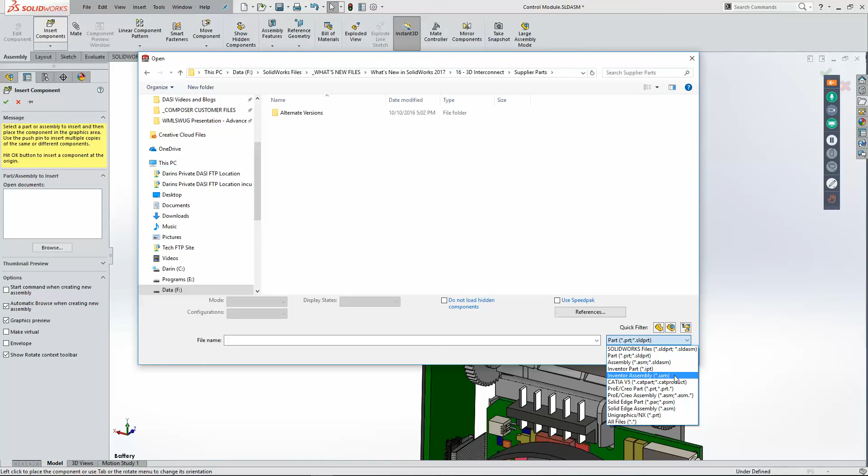We're first going to go ahead and open up an Autodesk Inventor assembly. But as you can see, V5, Pro E, Edge, and Inventor, and UG are all on this list. So we're going to take our Inventor assembly. Now when I click this button, this will take about 5 seconds. So click, 2, 3, 4. Perfect. So performance on this is pretty quick.

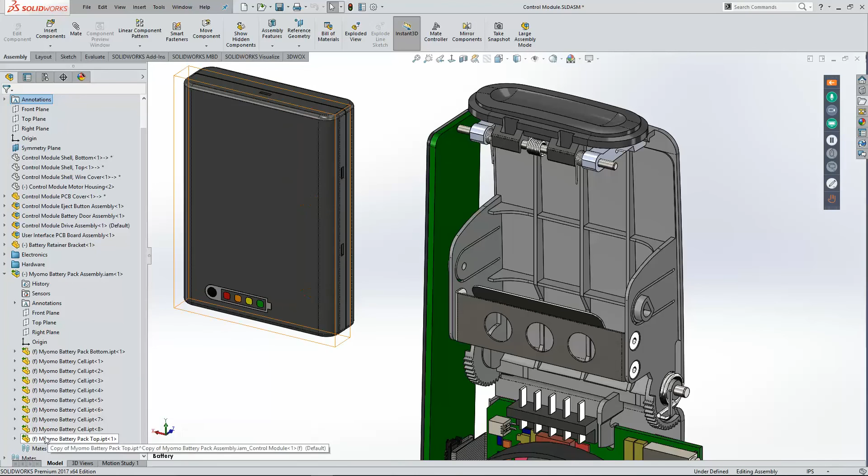What happens in the Feature Manager is you'll notice that the file name itself still is listed as the name it was when we opened it, but it's got the Inventor Assembly extension added to it. There's also a tiny arrow on that icon, which indicates that this file is looking externally for its definition, as is the same type of icon for all of the parts. If we look inside this assembly, you'll notice this battery pack has 8 batteries to it. Now it comes in with all of its reference geometry, and this is usable.

You can take the right plane here, the right plane here. We're just going to go ahead and mate those up symmetric to each other. We're going to select through our part right here, and I'm also going to select the back face of this assembly. We're going to mate it up to the front of this rib. Now, final location on this one, I'm going to use this right down here. We need to grab this battery terminal and the face that we've got right up there, and we're just going to mate those tangent.

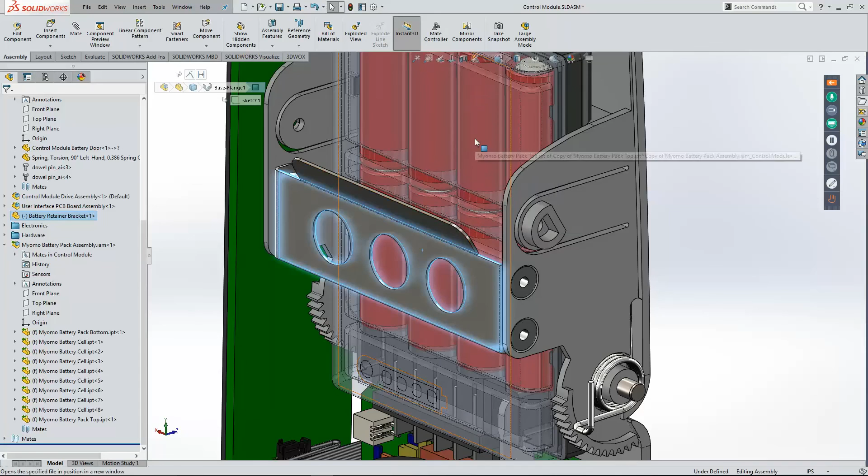Now another mate that we have here is really to illustrate a point, and it has to do with this sheet metal bracket on the front. You'll notice the battery pack is very narrow compared to where this bracket is positioned. So we're going to take the back side of this bracket, and we're going to mate that up with the front side of our battery pack. There are in-context features of the holes and the subsequent rivets that are mated into those holes, which will have to move as a result of this in-context feature.

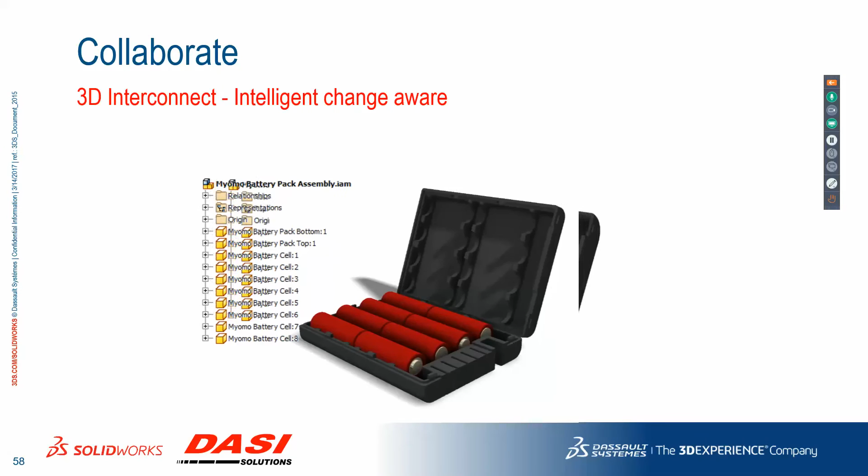And there you have it. Inventor assembly brought into a SolidWorks assembly and kept native, but used as if we designed it ourselves. Now what happens in Inventor is the user continues to work, and what's happening there is he's making changes and he's hitting save. Simple as that.

Now I don't have Inventor on my machine, so I can't make that change live for you, but I'm going to show you exactly how we illustrate this change. By going into Windows Explorer, what I need to do is actually access that folder. And this is the folder we're looking at, our supplier parts. Here are the Inventor assemblies as well as a few others, and I need to go ahead and simulate this by copying over the new version over top of the old.

So my second version of my battery pack, I will simply copy and paste over top of the one that I've referenced, as if the Inventor user has now changed and saved the file. Now back in SolidWorks, it all looks the same until I hit rebuild. And what you'll see is that this icon now takes a different change, and there's a small rebuild icon showing. As far as the user is concerned, I just have to right-click and say Update.

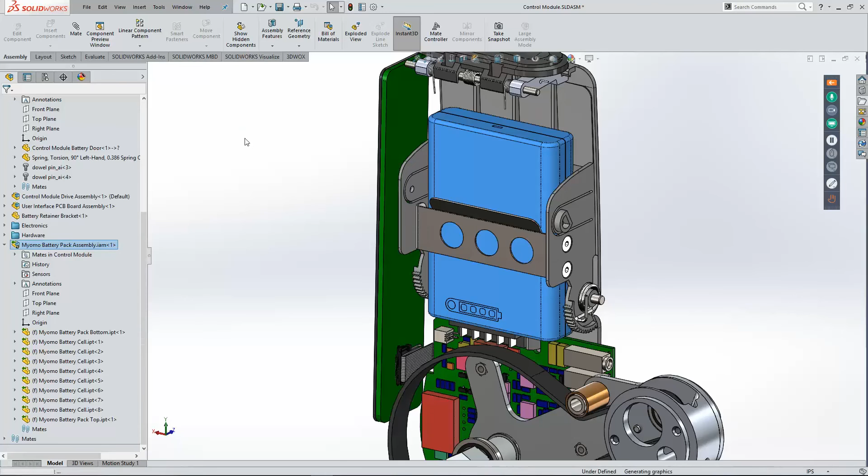Anything that changed in Inventor will now show up in SolidWorks, and all the face and edge IDs will be maintained, including the in-context relationship to the bracket on the front. Once again, this file never has to be translated fully into SolidWorks data, and it can always sit and reference the original CAD data, even when PDM is used.

Now the second method we're going to do is we're going to open up a Pro Engineer part, and we'll use that inside of our assembly in a normal environment. So let's go ahead and do that. So in this case, I'm just going to do a basic file open. We'll browse to our file here, and we'll just simply open our Pro E component. Now what happens is this file opens up in its own window in more of a traditional method, yet it is still referencing the external file.

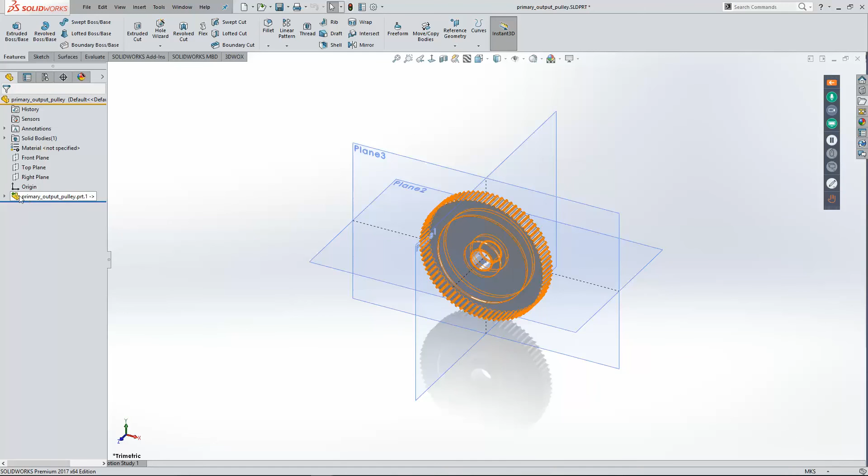Now I'm going to go ahead and make a change to this document, and we'll do that in a typical way that I would take when it comes to gears and sprockets. I've got some design library elements over here that I want to utilize, and this is not only to make it more of a realistic circumstance, but also show you how the referencing maintains and updates as we go. So I'm taking a feature and I'm dropping it on a face, and that gives it a relationship just right there.

But when we locate design library features, we also have to pick relevant edges in order to locate and position these. So by grabbing a circular edge on the inside of the part, it will position my keyway and also auto-locate it based on the diameter of the hole. Great. And now I'm going to go ahead and put in a curved slot. Now this slot is huge compared to the preview that I've got here.

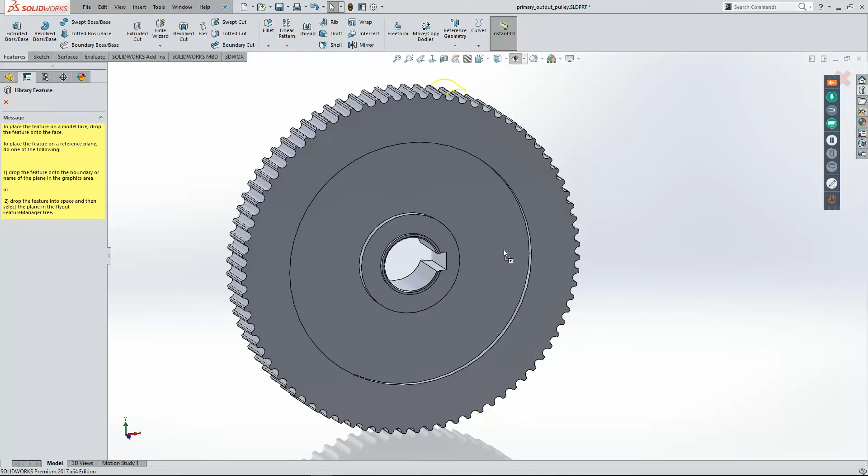When I drop it in place, the outside edge of it will be co-radial to whatever edge I select. So I'm going to pick an edge here, and it will size down and put my curved slot exactly where it needs to be. Great, let's go ahead and save this file and move on. So I'm going to take this document and we'll just do a little smart mate here from one file to the other. Just grab the circular edge, drag it into the assembly, and there it goes. It's now mated up and it moves very, very nicely.

However, this is where we start to see whether it's truly going to work for us or not. Now when we find a problem like this is typically when we get on the phone with our supplier and tell him we need to make a change. Well, the way changes take place in Pro Engineer is they add a numeral to the end of the file name, and this is version control, whether you're using their PDM tool or not.

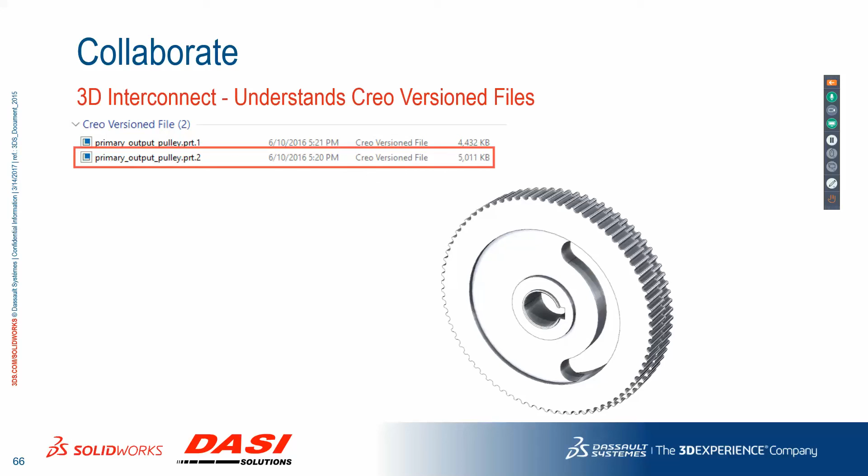When a Pro E person changes the file and hits save, it makes a new version by adding a new dot to the end of it. So this is what we're going to illustrate now by using our Windows Explorer technique. So with this file right here, I simply have to have that part 2 adjacent to the part 1. So again, we'll go into our alternate versions.

This time we'll pick our part 2, and I'm simply going to copy it so that it's in the same folder with part 1. Now back here in SolidWorks, you'll notice right here this icon once again. Once I hit rebuild, you'll see that it now is aware of the second version, and from there it's going to give us our rebuild icon. A right click once again and an update will yield not only the new geometry but also the changes made to the features that I added.

Edge IDs update, the file updates within the assembly, and everything looks fantastic. So very much a hybrid environment if you do happen to have those multiple tools within your facility, or you receive data on a regular basis from users who actually utilize these tools.

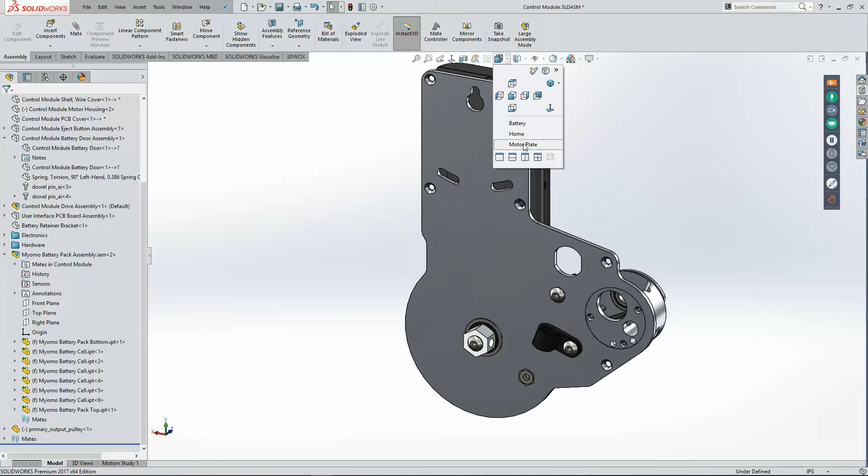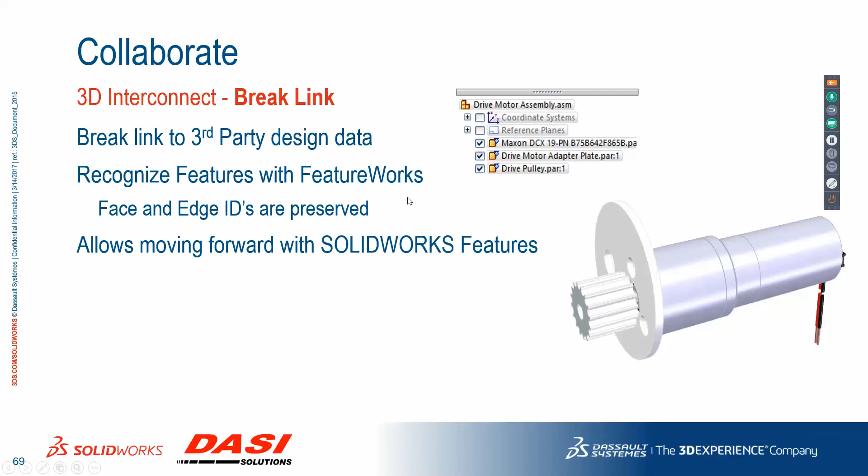So the last method we're going to show here is the more traditional method, where we're going to import data and then we're going to break the link. But once again, face and edge IDs are preserved through this entire process. So back in this assembly, let's go ahead and insert components one more time. We'll browse, and this time let's go ahead and select a Solid Edge assembly. Once again, performance is very fast, so when I click OK, I wait just a few seconds on this assembly, and there it is, right where I need it.

Now, utilizing very basic snap-to-fit SmartMates in SolidWorks, I'm just going to use my Alt key. We're going to pick and drag our part into position. It's not quite the direction I want. Tab key will take care of that. And then let's just go ahead and finish locating it. Concentricity in a couple of places, and that looks pretty good.

Now, this is where I start to validate this imported data to see whether there are fit or alignment issues. Now, the fastener holes look pretty good, but I think you can see right here, these two holes just do not match up with each other. Now, this is the point where I either have to decide, do I want to get the supplier involved, or do I want to make the change myself? Well, here we're going to make the change ourselves.

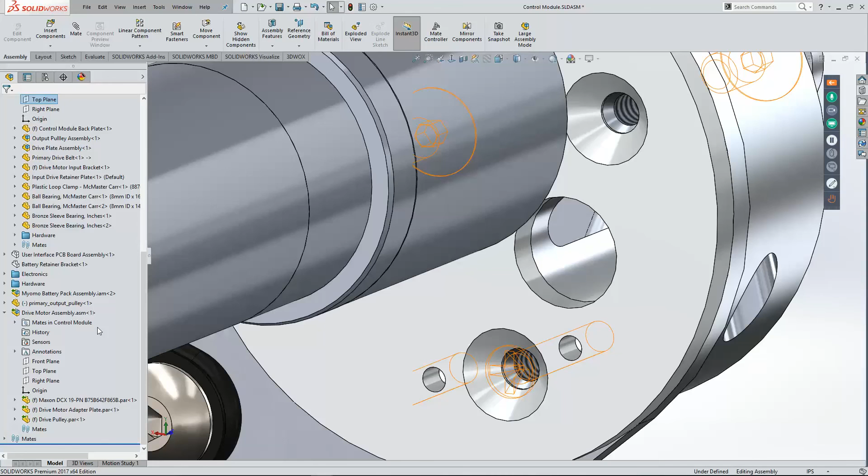To do that, though, we have to sever the link to the original data because we are going to make a one-off as a result of this. So you right-click on your assembly or your part and say Break Link, and it will remind you that this cannot be undone. For the part that I want to modify, we're also going to right-click on it and also say Break Link. Yes, it cannot be undone. The purpose on this one is that I want to take that part and I want to run some feature recognition on it. Now, for those of you who are unaware, every license of SolidWorks has FeatureWorks: Standard, Premium, and Professional.

Now, to do it, you can either right-click on the full part and run FeatureWorks right through the menus, but it doesn't have to be an all-go or no-go proposition. A simple right-click on the feature you'd like to edit and an Edit Feature will actually run FeatureWorks dynamically and translate that feature into full parameterized data. We've got one here that's the right size as a hole in our Hole Wizard library. Therefore, it gives us Hole Wizard functionality.

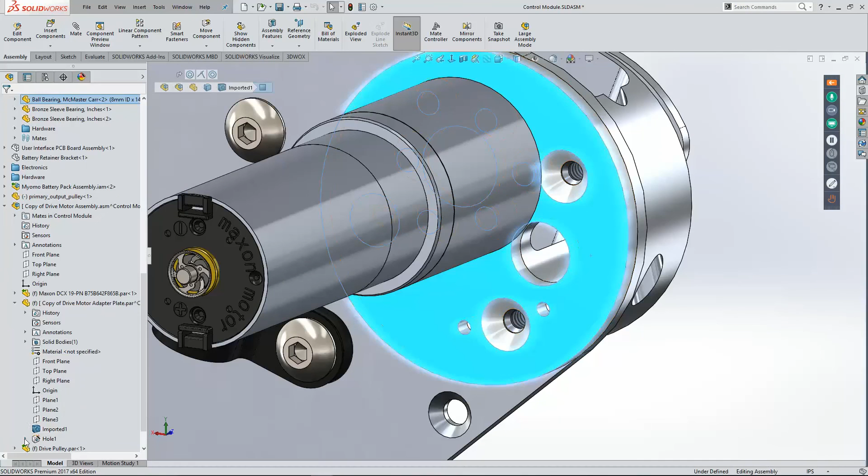That said, I can now go back into my assembly, identify where this part is, and then go ahead and make a change to that Hole Wizard feature. Here, we're just simply going to go ahead and edit the sketch. We'll toggle this thing over to wireframe briefly so I can pick the edge out from behind, and we'll just make those concentric to each other. Perfect. Now my hole's been modified, its position is proper, located based on the hole it needs to mate to, and everything looks great.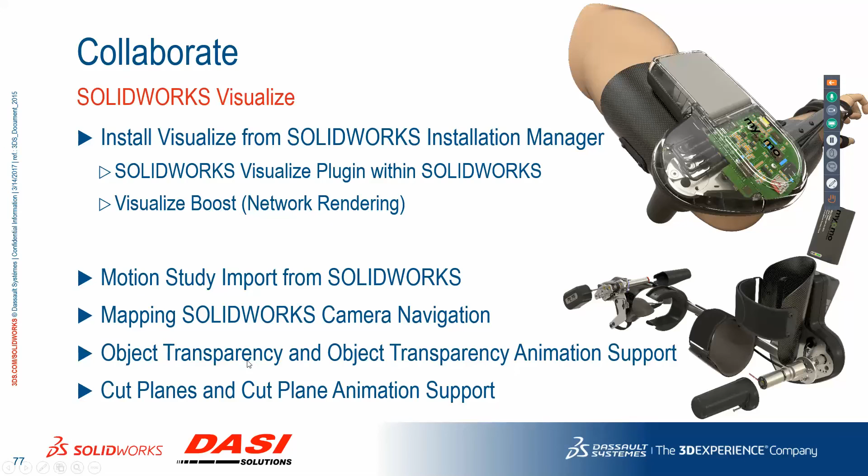We also have new camera navigation, which is the same as you'd use in SolidWorks. So if you are a dual functionality person who has to do rendering, scroll wheels and clicks and right clicks will work the exact same way as they do in SolidWorks. And then some transparency and cutting plane animation capabilities.

So for Visualize Boost, you need a new serial number. You go ahead and load that up on the computer, and what that will do is then take the rendering off of the computer that's actually producing the SolidWorks Visualize data. So farm rendering, so to speak.

What also is happening these days is, based on your video card, of course, you're going to get more bang for your buck when it comes to rendering. And this is where things like multi-cores and multi-threaded functionality really get leveraged. Well, you notice in these different levels of the Quadro video cards here, you're also going to get different performance capabilities. And in some cases, GPUs, most cases actually, are better than CPUs. So in many server applications, they're loaded with NVIDIA video cards as opposed to motherboards with Intel processors.

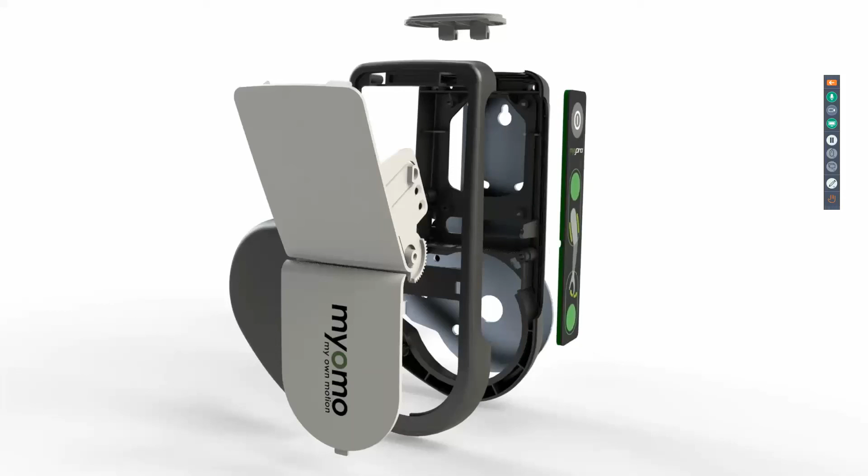Now Visualize only uses Quadro shaders, NVIDIA files or NVIDIA software. So if you do have an AMD or an ATI, please get a hold of us and we'll talk to you about the options there. Now this is an animation based on a motion study that was done in SolidWorks. Little tabletop rotate as well as the explode and collapse steps along with a little bit of rotation. That was produced in SolidWorks and rendered in Visualize Professional.

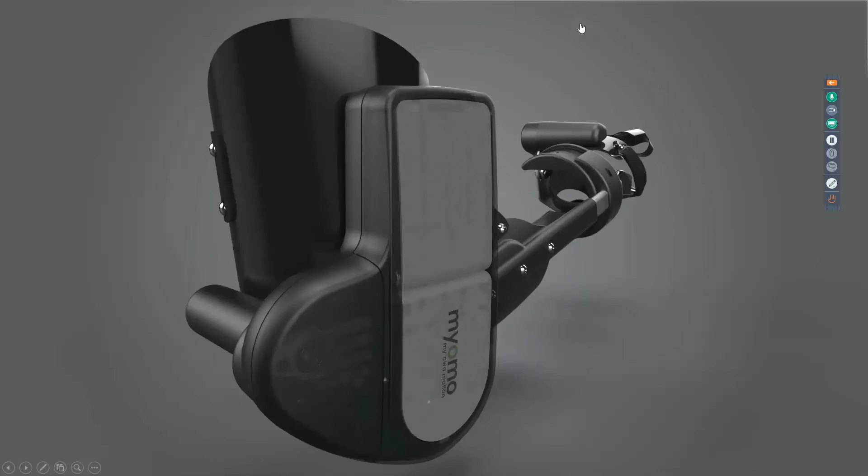Simple check mark here allows us to have our mouse wheels and buttons work exactly the way they do in SolidWorks, which helps from a comfort level standpoint for sure. Now this animation is a transparency animation, so you can see the part slowly fading away. But one of the things that just never ceases to amaze me about this tool is the absolute quality of these renderings. When we do the section view here, you'll also get a great feel for that once we reveal the lights on the battery pack itself.

The nice soft glow of those LEDs really gives you, again, a great feel for not only the quality of the lighting, but also in this case the depth of field as the part fades and gets blurry as it goes out from the center point of focus.

All right, SolidWorks routing. Last thing that we're going to cover today. Routing is a SolidWorks Premium operation, but it's one of those things where it really enables those users that do piping and conduit and hose runs and electrical very often. It really gives you a very powerful automated process for making these things happen. Now this time we've added new piping libraries in the form of these nipple libraries.

Now these work differently than a normal fitting does because with a nipple you're talking about a threaded component. And most of the component libraries we have that are full of T's and elbows and reducers and other types of fittings, they're going to go on the inside or the middle of a run. Now what happens when we drop this nipple there is it's going to segment the pipe back to the proper connection points as you'd typically see.

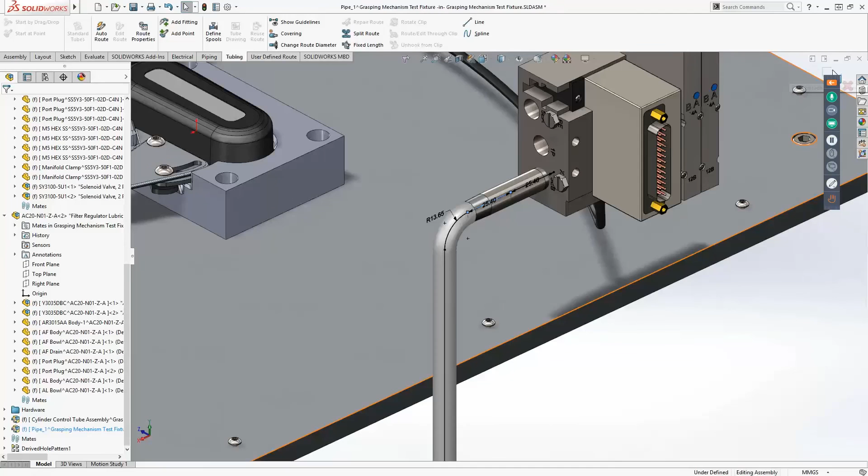But we can also go ahead and right-click on this and simply remove that part of the route because the nipple itself is threaded, that piece of the pipe is unnecessary. When I do that on both sides and say OK, it will finish with the fitting and the proper thread engagement for this set of threaded tubing with elbows.

There's some other auto route enhancements when it comes to just the component layout tools, as well as automatically zooming to fit in tools and options after you add additional routing components. This is very convenient as your route grows while you create it. Now along the lines of you don't know what you don't know, this is an interesting one to me right here. We have the ability now to create exploded views of routed assemblies. The you don't know what you don't know part is that I didn't know we couldn't do this.

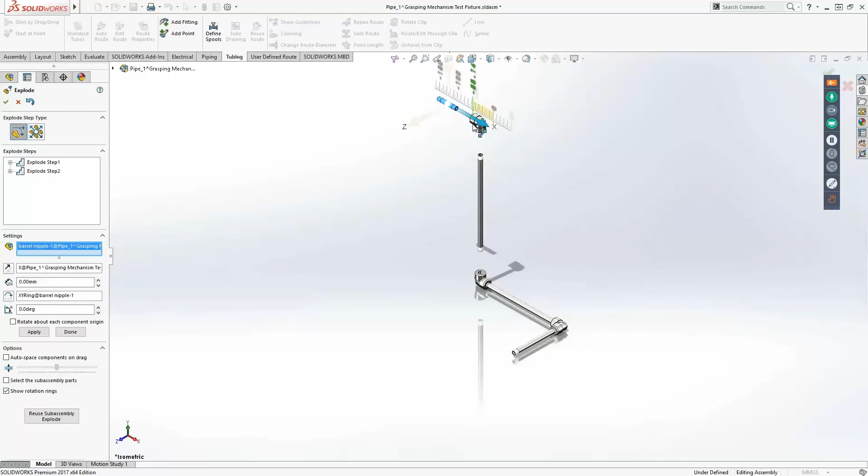I guess I just assumed we could. So this time around, what we can now do is take a routed assembly, which is different technologically than a normal assembly that's made up. So I guess it does make sense. But essentially a route is based on a 3D sketch. Here, we take the routed assembly and we use typical explode techniques that you would use in assemblies or other multi-body parts. So once again, didn't know we couldn't do this, but I sure am glad we can.

All right, almost done. That looks pretty good. Good.

Last but not least, we're doing more when it comes to electrical inside of routings, and a much needed enhancement here is the ability to flatten what we call a disjointed route. Now, disjointed routes are those routes that just don't simply have a point A to point Z set of connectors. In this case, we're going to see wires of the main harness go into a big clip, and then from that clip, additional leaders go out to other clips, jumping to power, jumping to ground, or jumping to signal wires.

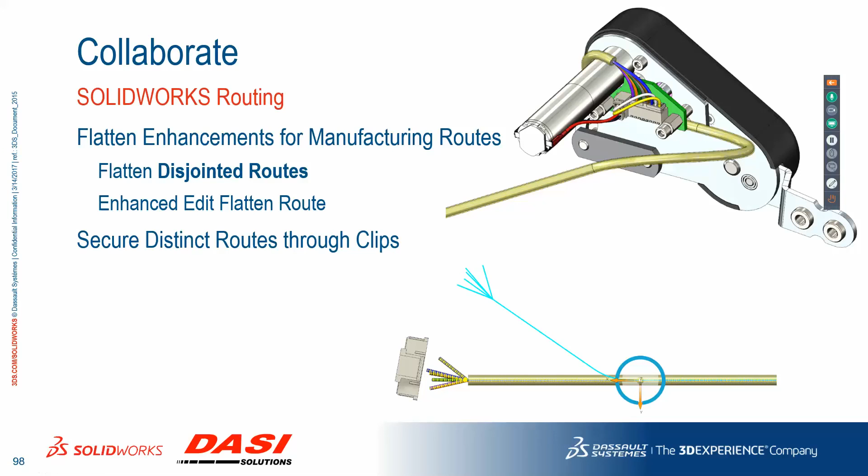Now, these are really dynamic, but they're also quite common, which is why it's a very important thing for us to have these. In the Myomo assembly, we have a main wire that's going from the front actuators back to the motor, battery, and circuit board assembly. Now, this is where we're going to see our main clip, but that clip is going to have some sub-routes off of that.

Now, anytime we take a route inside of SolidWorks, the purpose of doing this in 3D is, of course, to get those real 3D lengths. Because though you can make these in a schematic all day long, you just know what pins go to what pins and what components go to what components. But you never really know the physical length until these things are made. So in order to nail board this properly, you really do need to have these distances.

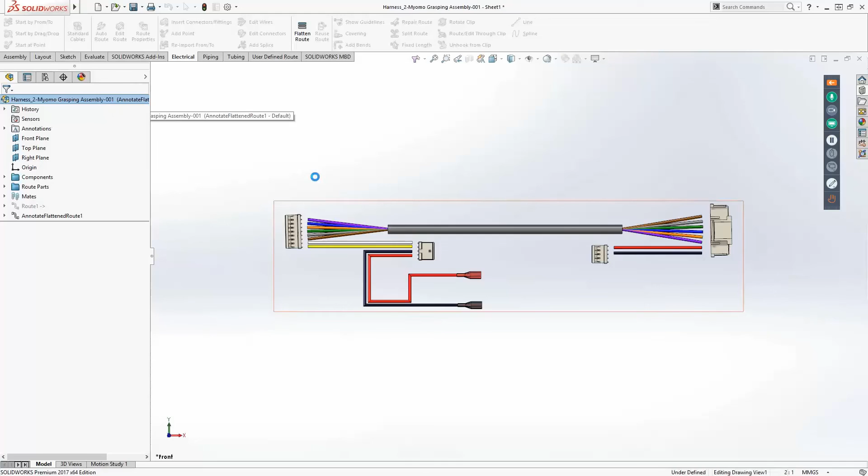Now when I flatten the route, I can either show it as real distance nail board verifiable, or more of a schematic mechanical layout so that we know what components lay in what positions and again where the pin alignments happen to be. Either way, shown in this more schematic method is still going to yield a bill of materials on the drawing that does give us those true cut lengths. Using a drawing like this, an assembler should be able to walk up to a spool wall, pull all of these wires in those quantities and those lengths, and then sit down at a table and assemble this harness with the proper fit and function.

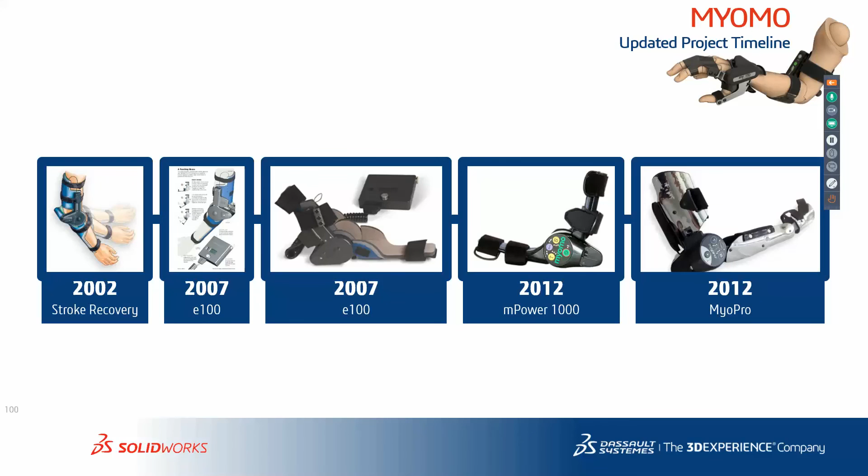So Myomo's been using SolidWorks since about 2002. They've had a couple of different iterations to the product, and now sitting here at 2017, although 2015 was the last release product, they've got another one in pre-production. But they've really been able to use SolidWorks to enable their designers to create not only more aesthetically pleasing products, because as they evolve, they're going to have to be a style item since users are wearing these things, but also much lighter, much stronger, and just a better evolution of the product with each iteration that they get.